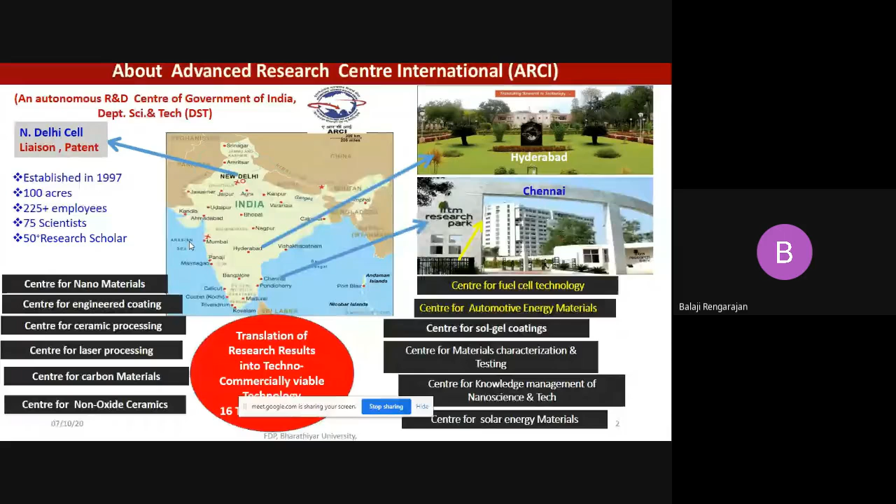Coming to our center, it's the Center for Fuel Cell Technology, established in 2004. We have about 20,000 square feet located at the second floor of the IIT Research Park, a multi-story building. We have a good number of employees ranging from senior scientists to scientists, research fellows, technical staff, students and trainees.

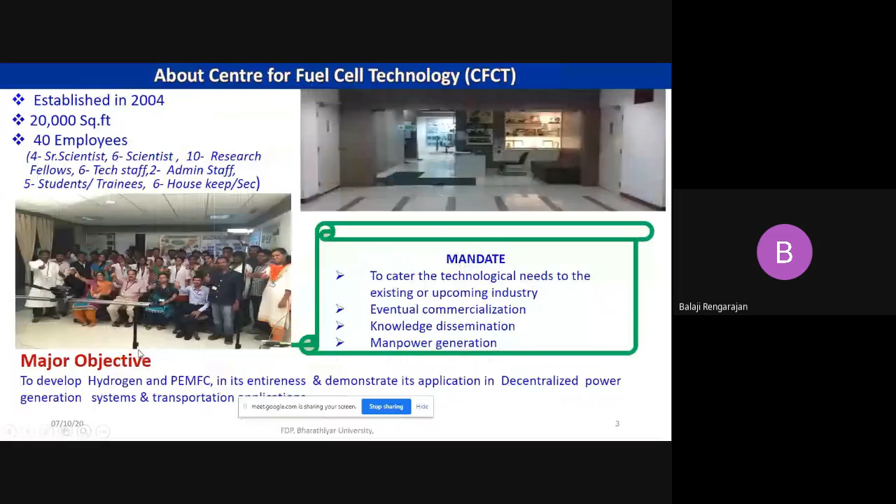As I said earlier, the mandate of the center is to cater to the technological needs of existing or upcoming industry, so eventually working towards commercialization. Our main objective is to develop a hydrogen-based PEM fuel cell system - not only a PEMFC stack, but an entire system. This means considering all the balance of plant required to make a viable system for power generation applications, especially for stationary as well as transport applications. That is the major objective of our center, and we are working towards that direction.

As you are aware, we are looking for alternative energy sources, moving from fossil fuel to hydrogen. We cannot switch over all at once from fossil fuel to a hydrogen-based energy economy, so there is a kind of intermediate stage currently, which I feel is the electric vehicle based sector. That will be the intermediate stage, and the ultimate objective is environmentally friendly, carbon-free or carbonless hydrogen-based vehicles for power generation, especially for transport and stationary applications.

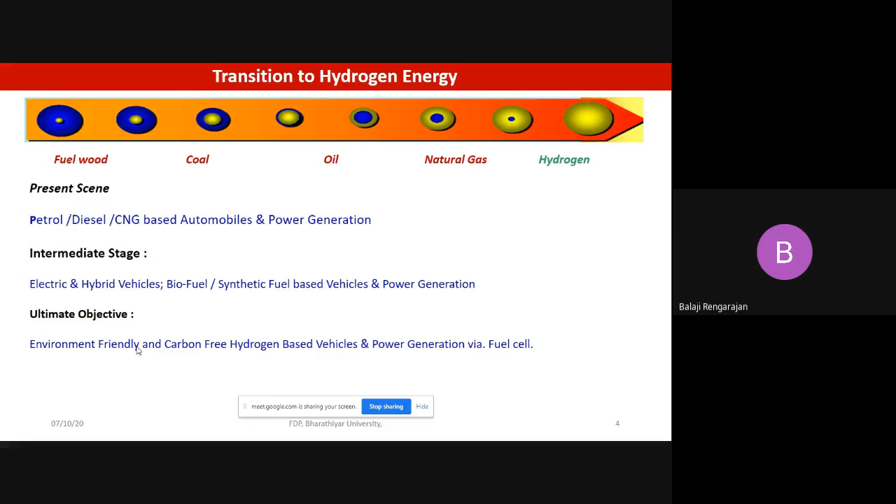That would be the ultimate objective of the entire world, moving from fossil fuel-based energy to hydrogen-based energy systems. There are many energy storage systems available, so why do we need to go with hydrogen energy? The answer is simple: it has high energy density compared with any other fuel, about 142 megajoules per kg of hydrogen, which is quite high compared with all other fuels.

Hydrogen doesn't exist as such; we need to generate it from hydrocarbons or from water. Ultimately that can be carried out using renewable energy as a source to get hydrogen from the fossil fuel or water-based system. When you use this in a fuel cell, there won't be any carbon-containing problems, there won't be any carbon emissions. That is the driving force for the global community to move towards a hydrogen economy, and when you use it for fuel cell vehicles, the carbon emissions are almost zero.

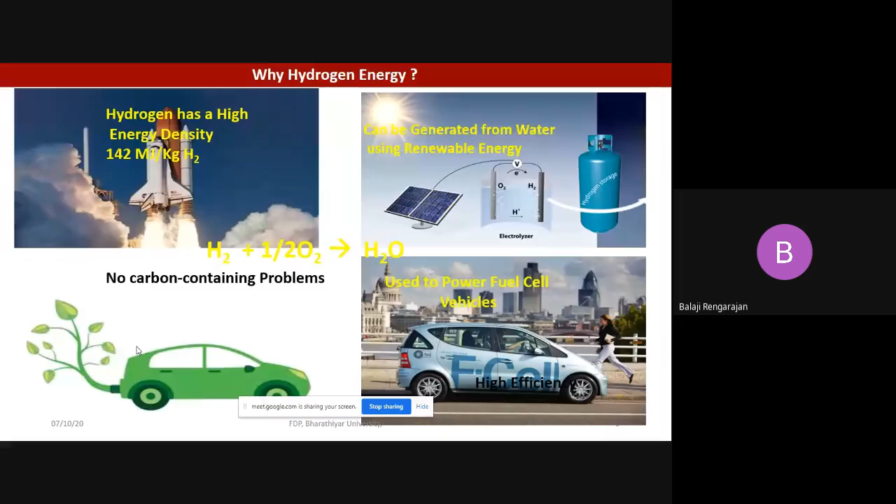So these are the driving forces for us to think about and move towards hydrogen-based economy, especially for transport and stationary applications.

Before going into application of hydrogen fuel cells for electric vehicles and stationary applications, I would like to give a basic overview of fuel cells, so that those of you who are not aware understand the functioning of fuel cells. Hydrogen is the fuel, so it takes hydrogen in and puts out electricity and water vapor.

When you do this combustion in an indirect way, it's an electrochemical way of converting hydrogen into power. The hydrogen gets oxidized at the anode. It's basically an electrochemical system, so you need to have an anode and cathode, which are based on platinum-based catalyst, carbon-supported platinum catalyst on both sides.

When you pass hydrogen gas to the anode compartment, it gets split on the surface of the platinum and generates protons and electrons. The electron goes to the external circuit, and when it reaches the cathode surface where oxygen or air is available, it gets reduced into water. So the ultimate product we get is power and water.

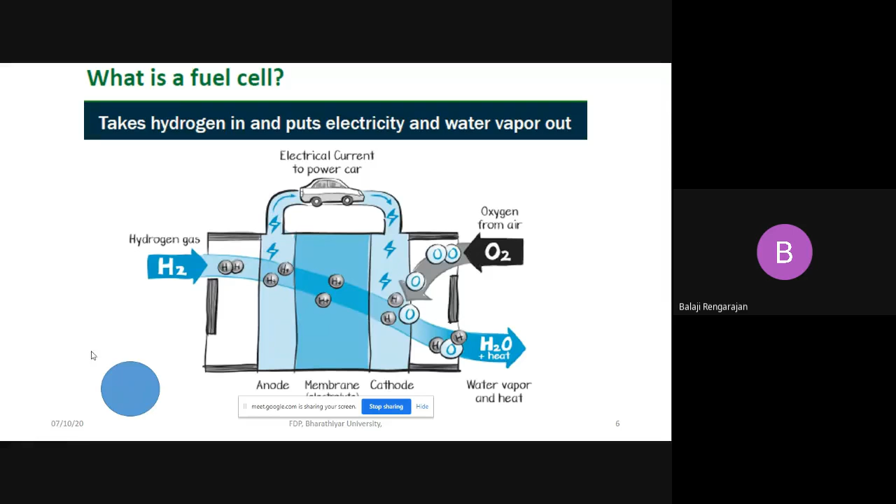That is the uniqueness of this technology. There are no carbon emissions and no other greenhouse gas emissions during this process. So basically it's an electrochemical system.

In any electrochemical system, we need to have electrodes, which are anode and cathode, and you must have an electrolyte. Depending upon the electrolyte used for the fuel cell, fuel cells can be categorized into 5 to 6 different types.

Apart from electrolyte-based categorization, fuel cells can also be categorized based on operating conditions, because temperature plays a major role. Depending on operating temperature and type of electrolyte, it can be categorized as solid oxide fuel cell, molten carbonate fuel cell, phosphoric acid fuel cell, alkaline fuel cell, and proton exchange membrane fuel cell, where we can use hydrogen or low carbon aliphatic alcohols as fuel.

That is named direct methanol fuel cell or direct ethanol fuel cell. Ultimately, that ethanol acts as a source for hydrogen, which is generated in situ in the anode compartment. So that also comes under the proton exchange membrane category.

Among these fuel cells, proton exchange membrane fuel cells are gaining a lot of momentum for stationary as well as transport applications, because the operating temperature is very low, near ambient conditions. The solid oxide fuel cell is also gaining momentum, especially for stationary applications, because the operating temperature is quite high, so it cannot be used for transport applications.

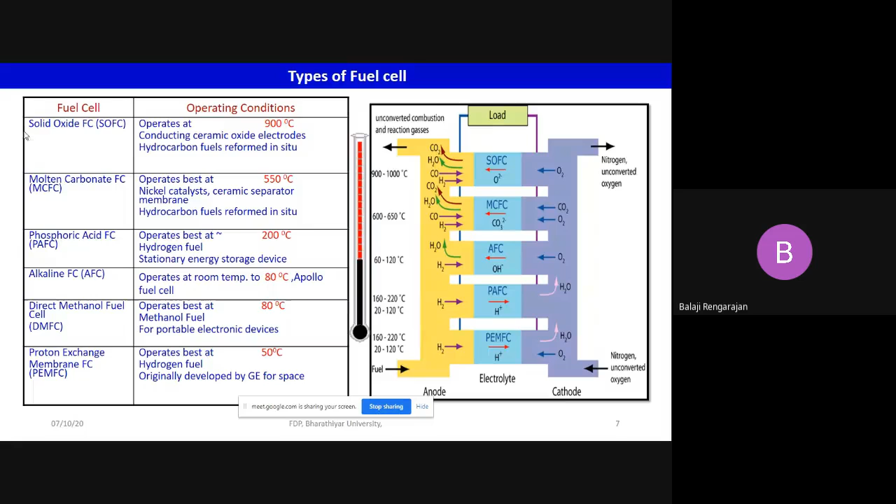In all these fuel cells, hydrogen is the fuel, which gets oxidized at the anode compartment, and air is the oxygen source, where it gets reduced at the cathode compartment, ultimately forming water as a byproduct, along with power generation. Depending on the application area, PEM fuel cell, as I said, is also used.

As a consumer electronics application, especially methanol-based fuel cells. And SOFC, as I said, is only for large scale generators, especially for stationary applications.

Molten carbonate and phosphoric acid fuel cells are high temperature and medium temperature fuel cells, which are also used for small to large scale stationary applications. But because of carbonate formation and other issues, these fuel cells have not been taken up further for commercial use.

And DMFC is only meant for consumer electronics like mobile phones, laptops, and cameras. It's a low power density fuel cell, so it cannot be used for transport or stationary applications requiring higher capacity. It's meant only for consumer electronics like mobile phones and laptops.

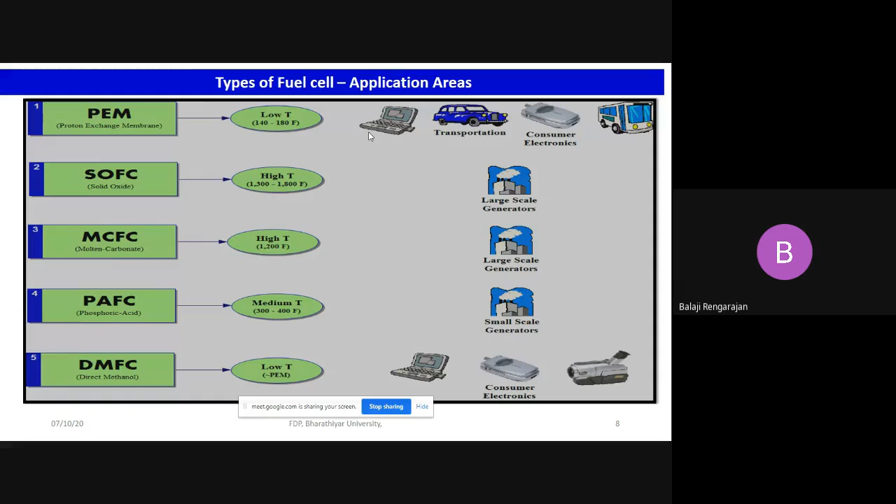So let's get to know about PEM fuel cells. For any fuel cell, especially the polymer electrolyte membrane fuel cells, the open circuit potential is about 1.23 volts theoretically, but in practice we only get about 1 volt. So that is the open circuit potential for the PEM based system.

When you talk about the polymer electrolyte membrane, the main component in this fuel cell is the polymer electrolyte membrane, which acts as a separator as well as the electrolyte. The electrocatalyst, which acts as anode and cathode, is coated on the two sides of the membrane. Once you coat this catalyst on the membrane, you get a membrane electrode assembly, which is the heart of the PEM fuel cells.

On both sides, people are using carbon supported platinum as an electrocatalyst. The amount of loading applied on the anode and cathode side will vary, especially since the large resistance and large overpotentials in terms of electrochemicals occur only at the cathode side. In order to overcome these issues, high platinum loading is usually applied on the cathode side rather than the anode side. So this membrane electrode assembly is the core component for the PEM fuel cell stack.

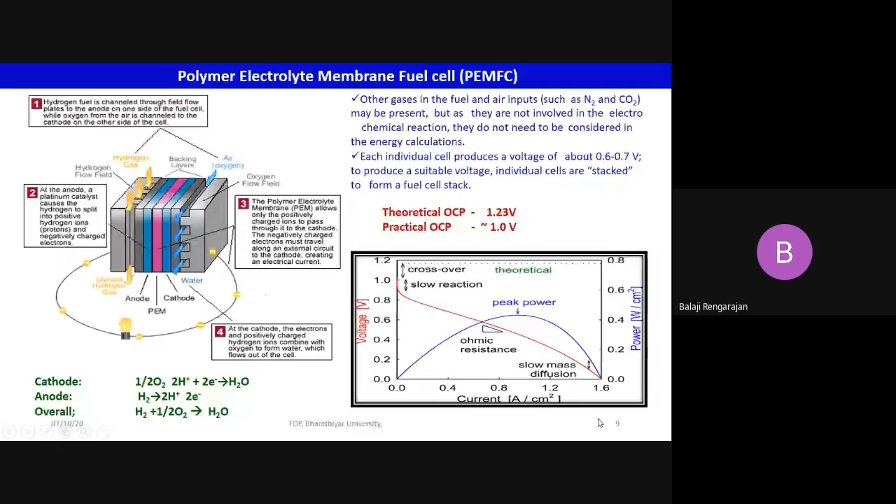The main component of the PEM fuel cell is the membrane, it's a Nafion, a proton exchange membrane. It's basically a Teflon backbone which is functionalized with the ether linkage and the active SO3H sulfonic acid group, which is responsible for the proton transport. So it's basically a very transparent, thin membrane, which acts as a separator for the gases as well as for the proton to transport from the anode compartment to the cathode compartment.

As I said, the platinum electrocatalyst is being used. In order to apply that platinum catalyst, we need to have some kind of substrate, so that is the gas diffusion layer, which is mostly carbon cloth or carbon paper, widely used. This catalyst has to be coated on the gas diffusion layer. Once coated, this electrocatalyst-coated gas diffusion layer has to be transferred to the membrane by hot pressing. You have to apply pressure and temperature in order to bind this gas diffusion catalyst-coated layer to the membrane. That will form a membrane electrode assembly, which is the core component for the fuel cell.

So you have an MEA, and this is a flow field plate, which is most important to facilitate the gas transport on both sides. If you have all those components, you will form a single cell, with the end plate and tie rods in order to pack the anode and cathode very compactly. So this is the typical representation of the single PEM fuel cell.

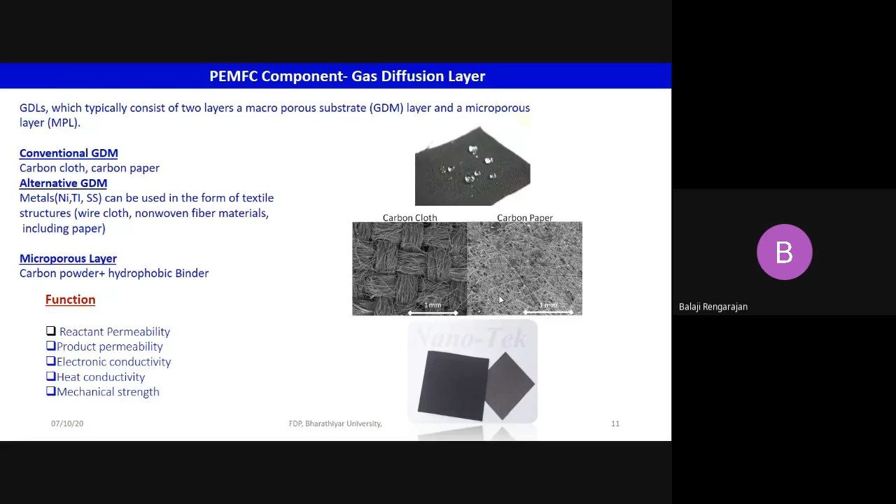If you increase the hydrophobicity of this carbon cloth or carbon paper, you will lose the electrical conductivity. But at the same time, if it is so hydrophilic, the produced water within the system will get choked within the fuel cell. So it has to be hydrophobic also. We need to optimize the hydrophobicity and hydrophilicity of the gas diffusion layer. Accordingly, we need to do some kind of treatment in order to facilitate the gas transport as well as the water removal. That is the role of the gas diffusion layer and its function.

Coming to the electrocatalyst, platinum is a very good electrocatalyst in terms of hydrogen oxidation as well as oxygen reduction. But due to the cost volatility and considering the cost, we need to try to minimize the platinum content on both sides of the fuel cell.

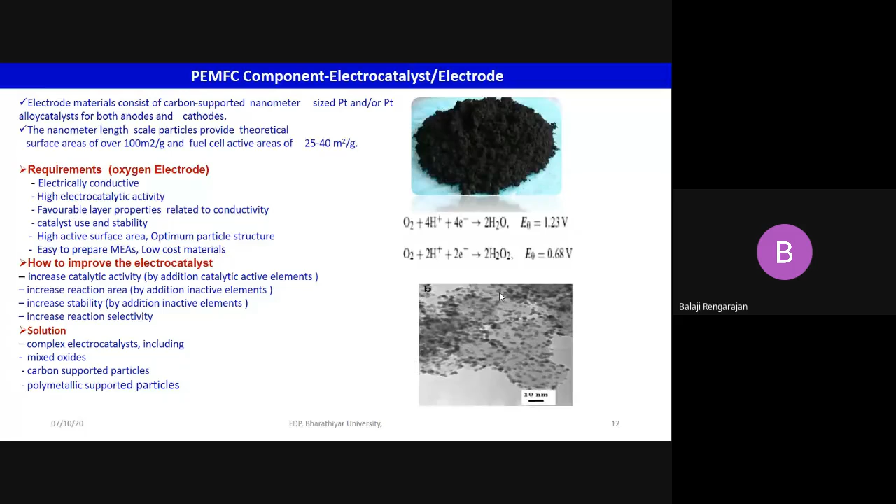So in order to reduce the platinum content and make it more conductive, and to utilize effectively every particle of the platinum, carbon is being used as a support medium to facilitate the electrochemical reaction at both compartments. This carbon helps because platinum nanoparticles are highly active, so in order to avoid agglomeration, carbon plays a major role. This carbon-supported catalyst is used as an electrocatalyst for the fuel cell, and the ultimate aim is to use low platinum content on both electrodes.

Next is the membrane, which is most important, and this component makes the whole world a monopoly. DuPont's Nafion membrane is the monopoly in this technology, and there are many R&D programs going on all over the world, but none of them can meet the required properties of Nafion. So almost 60 to 70% of the world community is depending on this membrane if you want to make a PEM fuel cell stack.

The uniqueness of this membrane is that it facilitates the transport of proton from one compartment to another, and it also absorbs water—hydrophilicity—because it has a tendency to absorb water molecules. So if you want to carry out proton transport within the membrane matrix, it should be in wet conditions. Only then will the effective proton conductivity of the membrane be high. So the membrane should be in a wetted condition, as it has a tendency to absorb water.

But at the same time, if you operate the system at very high humid conditions, water logging takes place within the system. As I said, we need to be optimum in maintaining the water within the fuel cell system and fuel cell stack.

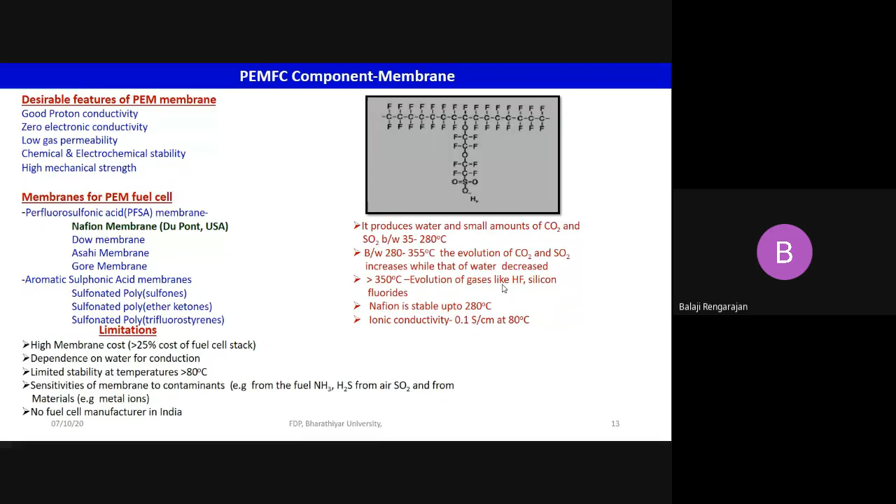And it has a very good mechanical strength—it's basically a thin membrane. If it gets peeled off or develops pores, the direct combination of hydrogen and oxygen will lead to explosion, so that kind of mechanical strength should also be there, and it meets that requirement. It has very good mechanical strength in terms of assembly, it is highly pore-free and will not allow the mixing of gases inside the cell, and it has very good proton conductivity as well as thermal and mechanical stability.

And if you form a membrane electrode assembly, in any electrochemical system, if you try to minimize the inter-electrode distance between anode and cathode, you can reduce the resistance of the cell. So in PEM-based technology, the inter-electrode distance depends on the membrane thickness. There are various kinds of membrane thicknesses available in the market, like 117, 115—these are various configurations of the membrane. The last digits represent the mil, which represents the thickness of the membrane.

Take Nafion 117 for example: 7 mil, and 1 mil is equal to about 25 micron. So 7 into 25 is 175 micron—that is the thickness of the membrane, and that is the distance between the anode and cathode.

So if you try to minimize the inter-electrode distance by using a thinner membrane like 212, only 50 micron is the thickness of the membrane, which determines the inter-electrode distance between anode and cathode. If you use a thinner membrane, the resistance of the cell will come down, so the performance will go up. That is the kind of trade-off we need to consider when assembling a PEM fuel cell system.

And as I said, the catalyst loading at the anode side should be low because of the higher exchange current density and faster kinetics of the hydrogen oxidation. In terms of oxygen reduction especially, the kinetics is very slow, so in order to increase the kinetics, we need to use higher platinum content.

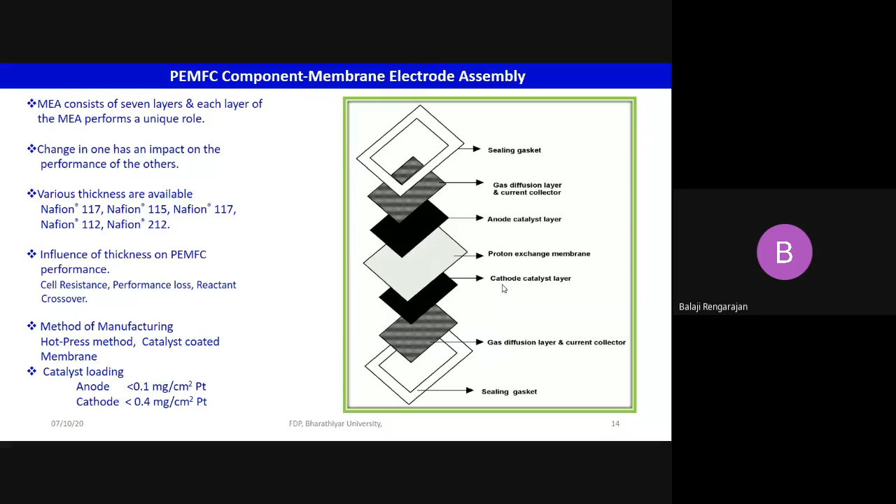So the cathode has more platinum content than the anode. This is the bipolar plate, which I discussed earlier. Graphite plate is being widely used as the bipolar plate, and it has very good electrical conductivity, thermal conductivity, and mechanical stability.

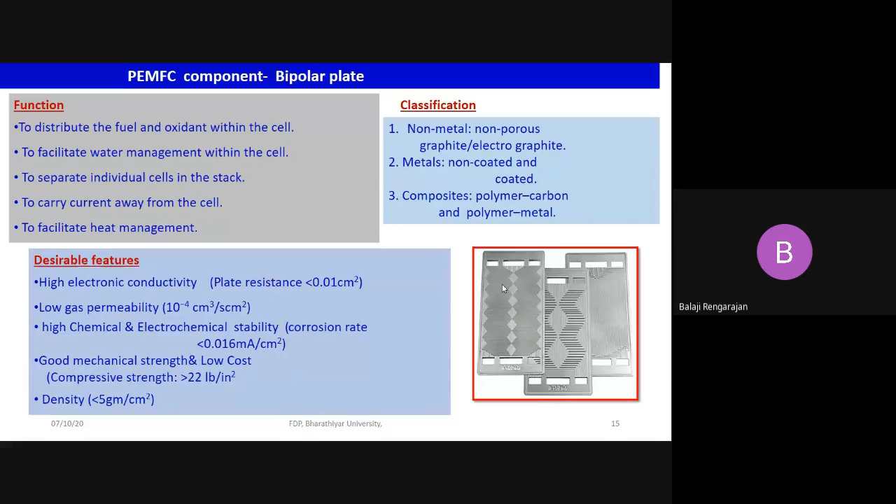So all these are desirable features which graphite has. Most PEM fuel cell stacks are fabricated using graphite as the flow field plate, which facilitates gas transport on both sides of the cell.

As I said, the stoichiometric quantity of hydrogen and oxygen has to be varied depending on the load we are drawing from the system. So for example, H2 plus half O2 gives H2O. For a 1 kilowatt system, you have to pass 12 liters per minute of hydrogen and 6 liters per minute of oxygen, so it should be in the stoichiometric ratio of 1:0.5.

In order to handle such volumes of gases at the two different compartments, we need two different flow field channels, which determine the volume of gas we need to occupy at a particular time in order to draw the maximum amount of load or current from the system.

There are various design patterns available, depending on the type of application for which you are using the fuel cell. It can vary from grid type, straight parallel, single serpentine, or multiple serpentine — these are all different flow patterns for handling the stoichiometric hydrogen and oxygen.

This is also one of the cost components in the PEM fuel cell. More than 25% of the fuel cell stack cost goes to the bipolar plate, which also determines the volume of the fuel cell stack.

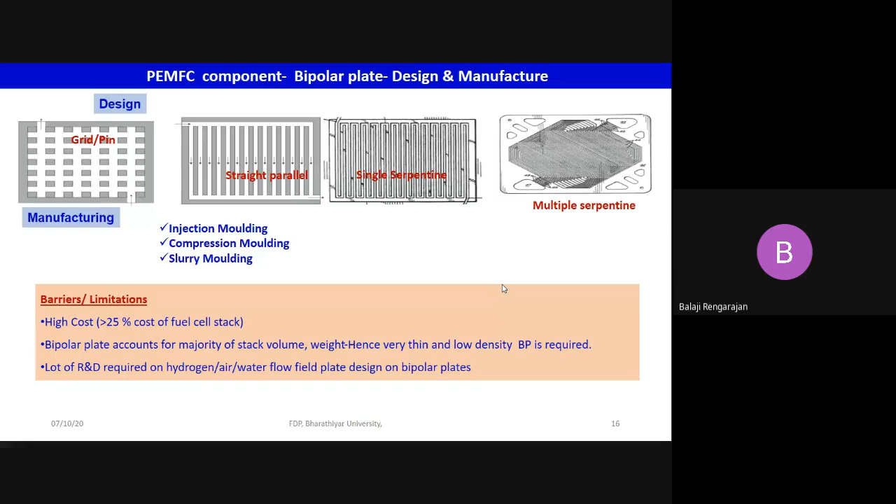So as long as you use a very thin graphite plate, the volume of the fuel cell stack will come down. This is also a deciding factor in terms of volume occupancy of the fuel cell, especially for transport and stationary applications.

So once you form all the components, you can make a cell, and depending on the current and voltage requirement, multiples of this unit will form a PEM fuel cell stack. These are the schematic diagrams of a single cell and PEM fuel cell stack of a hydrogen-based system.

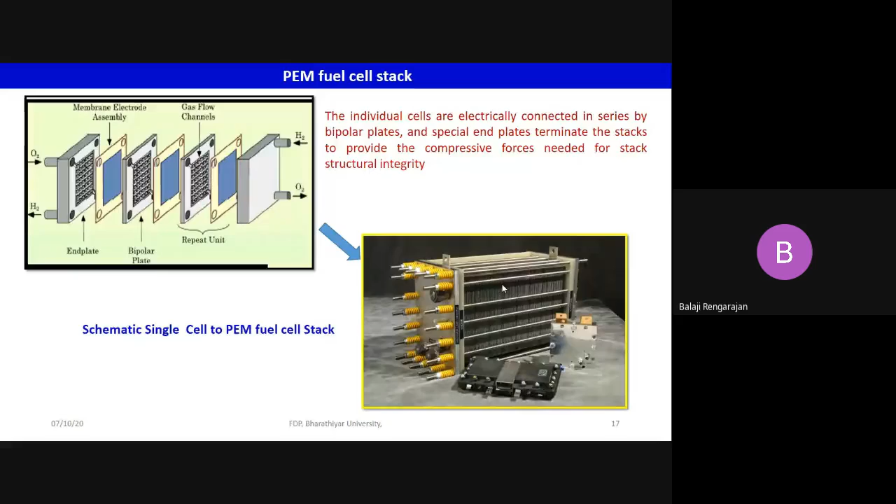As I said, water management is a very crucial step in the PEM fuel cell, because if you remove all the water from the system, the membrane conductivity will go down — proton conductivity is effective only when there is water within the system. But at the same time, if you keep too much water in the system, it will not facilitate gas transport from the outer side to the inner side, and will not allow gas to enter the catalyst surface. So water management is a very critical step in the PEM fuel cell stack.

So it should be hydrophilic as well as hydrophobic — it's the kind of optimum condition we need to attain in making the membrane electrode assembly. Water management is very crucial; it should be maintained in an optimum way within the system.

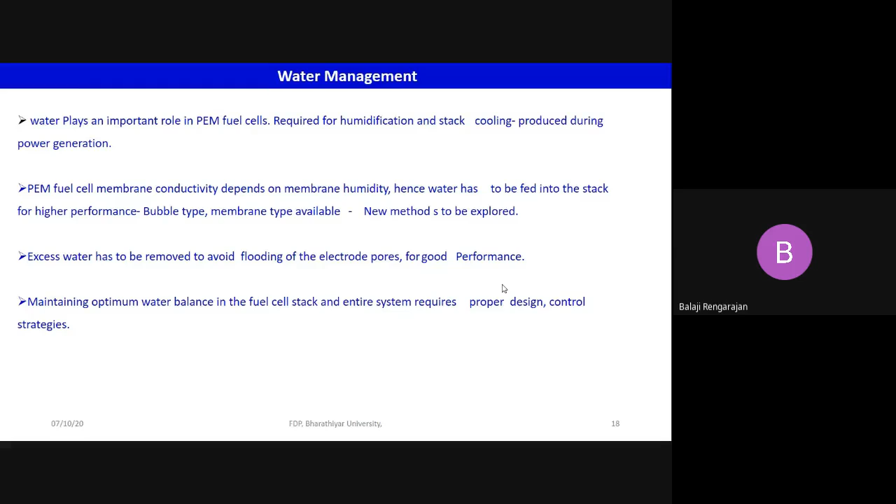As I said, thermal management is also crucial, because a 1 kilowatt system will also produce 1 kilowatt of heat, but it is low grade heat. So we need to effectively manage it, because the operating temperature of a PEM fuel cell stack is about 60 to 70 degrees.

If you operate at a higher temperature, membrane dehydration will take place, because above 100 degrees Celsius the water vapor will escape, causing membrane dryness. This creates a proton conduction loss that reflects in performance. So the optimum temperature for the PEM fuel cell stack is about 50 to 70 degrees Celsius.

So in order to maintain that temperature, you have to effectively remove the heat produced during the electrochemical reaction. In a 1 kilowatt system, about 1 kilowatt of heat has to be dissipated, so we have to have a proper thermal management system.

Water or air can be used as the coolant, which is widely used for the PEM fuel cell stack. But the water-based cooling system is viable when you operate the system at higher kilowatt. So up to 3 kilowatt, you can use air as the coolant, but when you develop a stack more than 3 or 5 kilowatt, you need to go with a water-based cooling system.

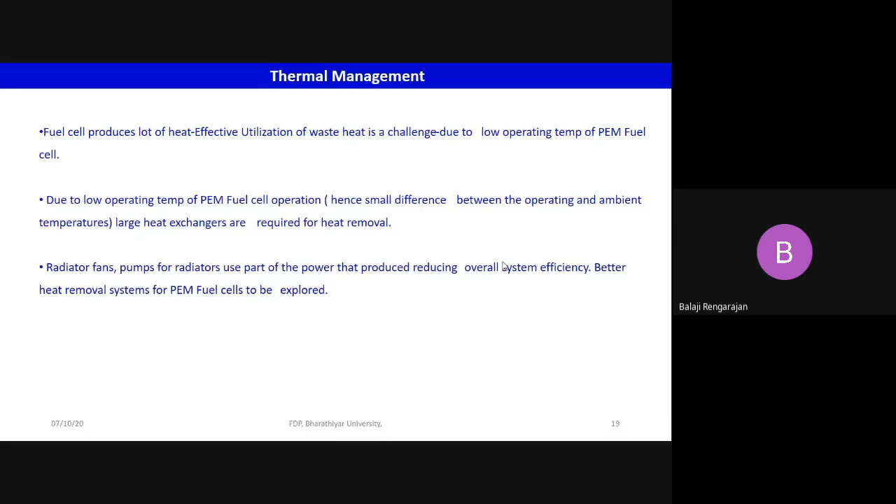So as I said, when you talk about the PEMFC fuel cell stack, it's a stack. When you talk about the system, we need to consider hydrogen as a fuel. Hydrogen does not exist as such, so it has to be produced from hydrocarbon or water. So you need a fuel, maybe hydrocarbon, natural gas—that is the fuel.

You have to process that hydrocarbon, especially methane, so it has to be converted into hydrogen-rich gas. So methane has to be converted into hydrogen—that is called the fuel processor. So through reformation, you reform the natural gas into hydrogen. The fuel is methane, and that has to be reformed into hydrogen using the fuel processor.

So the power fuel cell stack is the power section, and you need to have an air supply system. Depending upon the load, depending upon the current you are drawing from the fuel cell, you need to pass hydrogen and air accordingly—this is the load-following gas flow controller.

So a 1 kilowatt system can also operate at 300 watts, and at that time the fuel consumption and air supply has to be minimum. The same 1 kilowatt system, if operated at 700 watts, requires increased flow of hydrogen and air. So depending upon the load, load-following gas flow controllers are the most important component in making a PEMFC system, and that is the power section.

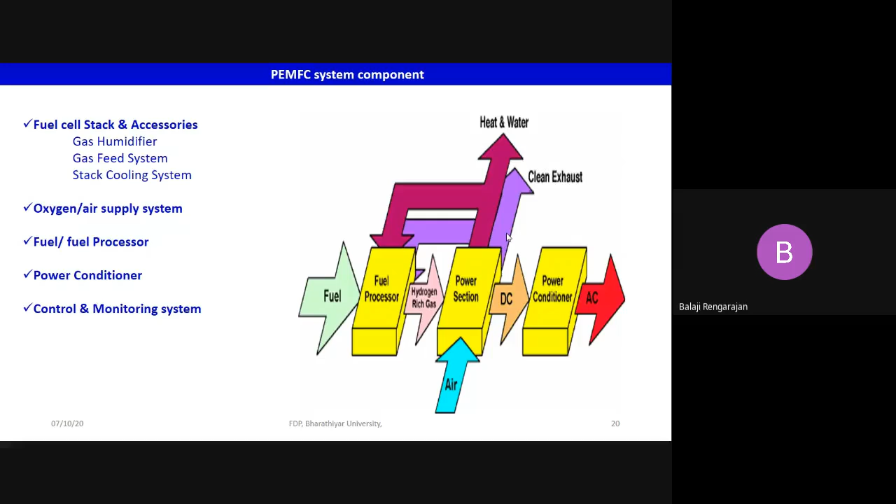But if you fail to monitor the health of each individual single cell, it will collapse the entire system. So the control and monitoring of the system also plays a major role when you develop a PEMFC system.

And the control strategy—we need to have some kind of strategic way of controlling these parameters. Especially in the case of fuel cells, it's a current driven process, not a voltage driven control strategy. These are current driven, basically based on load.

So if you have a 1 kilowatt system operating at 500 watts, the amount of water production will be low, the amount of heat production will be low, the fuel consumption will be low, and the diffusion process will be low. But if you operate the same system at 1 kilowatt, all these parameters change—heat production will be more, water generation will be more, fuel consumption will be more, and diffusion of the reactant will be more. So all these processes are controlled by the current.

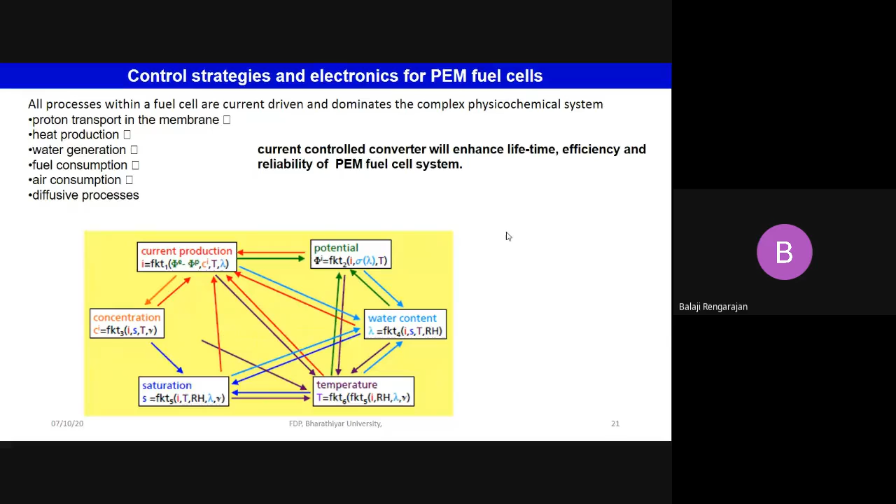So we need to have a control strategy, we need to develop an algorithm. It's a current driven and complex physicochemical system in the case of fuel cells, not a voltage based thing. So when you develop a control and monitoring system for the PEMFC, everything is based on the current driven process. That's what I want to highlight here.

When you talk about the PEM system, these are the factors we need to consider. Considering all these factors, the major activities taking place in our center is that it's not only PEMFC stack development—we develop the entire system, as discussed in previous slides. We take care of all the subcomponents, power consumption, functioning, compactness, volume, and all these considerations when we make a PEM fuel cell system.

And as I said, we also have a hydrogen generation program in a bigger way, and we developed a system with about 2,500 liters per hour production capacity.

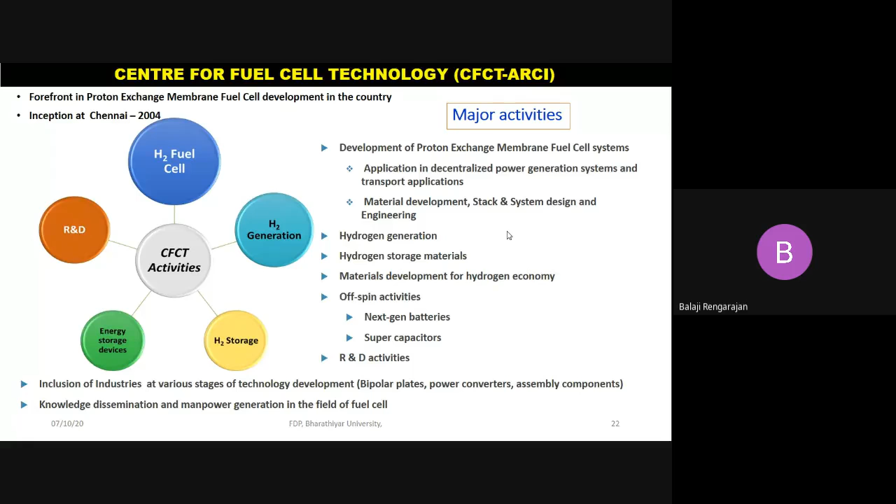And we have some kind of spin-off technologies, because if you see supercapacitors and next generation batteries, these are all spin-off technologies of the fuel cell—most of the components are similar to PEM fuel cell, and most of the material we develop is also used for other spin-off technologies like supercapacitors and batteries.

So this is our fuel cell development, and we also do a lot of R&D on materials development and component development for the PEMFC. But if you want to make a system level, you have to start with commercially available material. So if you want to make a system level, let's say 5 kilowatt, 10 kilowatt and 20 kilowatt systems, we will buy the commercially available components like catalyst, membrane and bipolar plate, and we do membrane electrode assembly, and we build the stacks, and we will develop our own control system and BOP components, and demonstrate the system for stationary and transport applications.

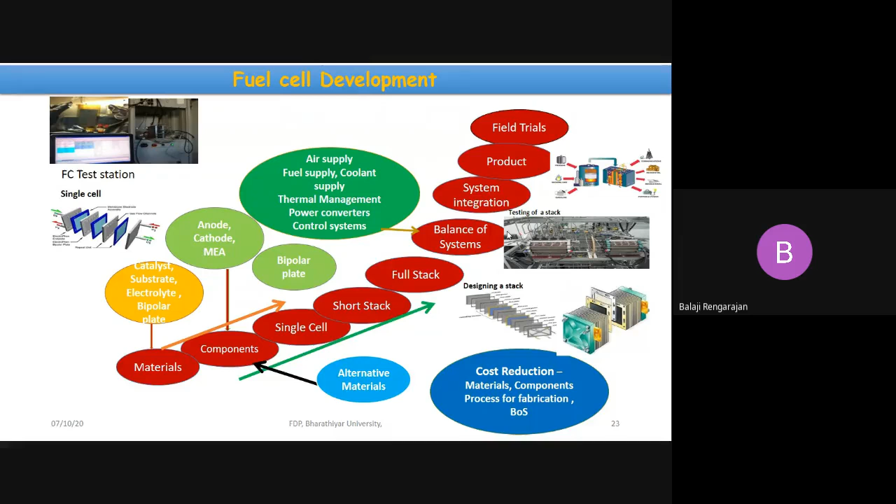That is one activity. Parallelly, we also develop materials which are tested initially at single cell level. If it works fine, we take it up for the next level of short stack and full stack. That is our parallel R&D activity, which is also going on with the help of students and other scientists. One is system development, another is component development, and another is material development. So we try to cover all aspects of this technology.

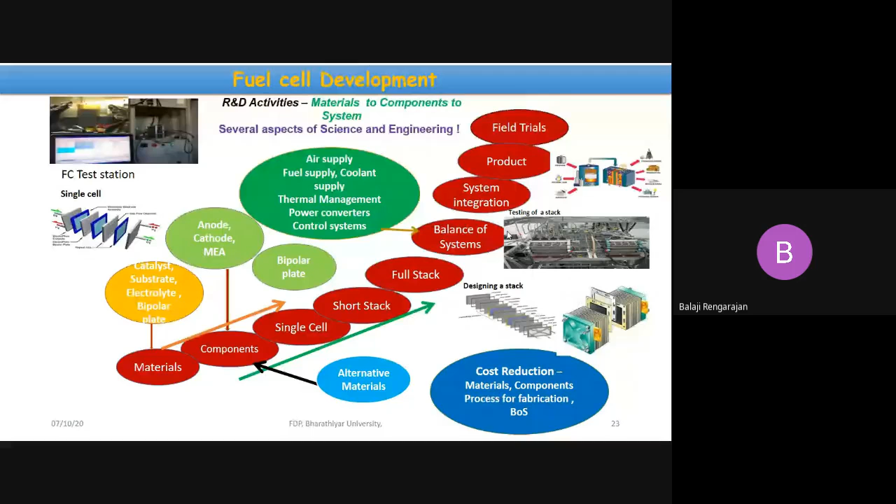So ultimately, cost reduction is the objective. We try to minimize the cost of the system, as well as increase the durability and reliability of the system. So this is our PEMFC technology development.

As I said, one of the core components is the bipolar plate, and ARCI has the technology to replace natural graphite, which is widely used for PEM fuel cell stack fabrication. ARCI has a technology of exfoliated graphite, which is 50% lower density than graphite, which will always reduce the stack weight. We use that exfoliated graphite material for making our own bipolar plates, which are very compact. Making grooves by machining is a tedious process, especially for graphite. Whereas in the case of exfoliated graphite, you can create flow channels simply by molding technology.

That is the uniqueness of our PEM fuel cell stack - 50% weight reduction in overall stack development, and it can also facilitate the process of creating flow channels over the graphite flow field plate. We could achieve 50% weight reduction compared to graphite. That is the uniqueness of our PEM fuel cell stack.

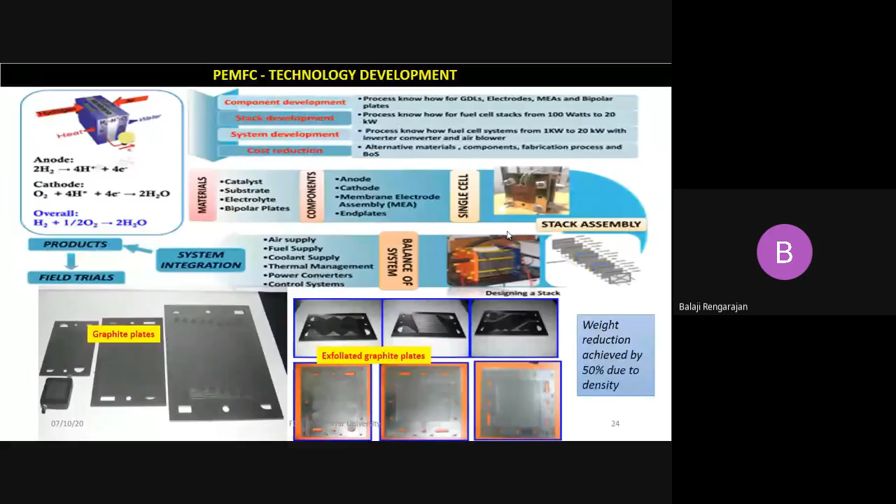And we have demonstrated systems ranging from 1 kilowatt to 20 kilowatt for stationary applications. It's completely grid independent - if you have hydrogen cylinders, you will get the power.

We have a small battery in all systems for the initial startup of all BOP components. For example, the blower has to supply air, you have to activate the mass flow controller for hydrogen supply, and you have to power on the converters and inverters. All these initial power requirements are met by the batteries. So all systems have a small battery for startup power, and once the system is ready to function, the battery is also charged by the fuel cell.

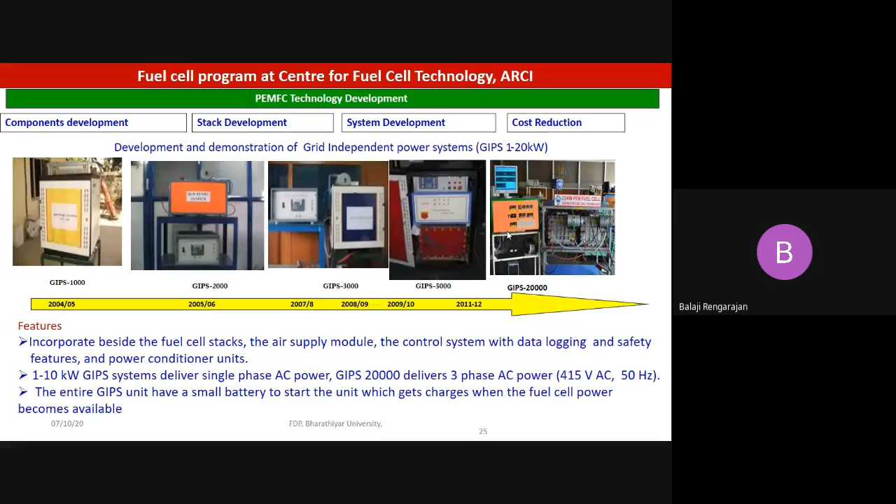We have demonstrated the fuel cell stack ranging from 1 to 20 kilowatt for stationary applications. The fuel cell produces DC power that has to be converted into AC. We have single phase up to 10 kilowatt, and more than 10 kilowatt we have a 3-phase system, which was demonstrated within our premises. As I said, the fuel cell produces DC power which needs conversion into AC, but we try to avoid that step because the conversion loss will reflect on fuel cell efficiency. So we try to use that DC power as such for various applications.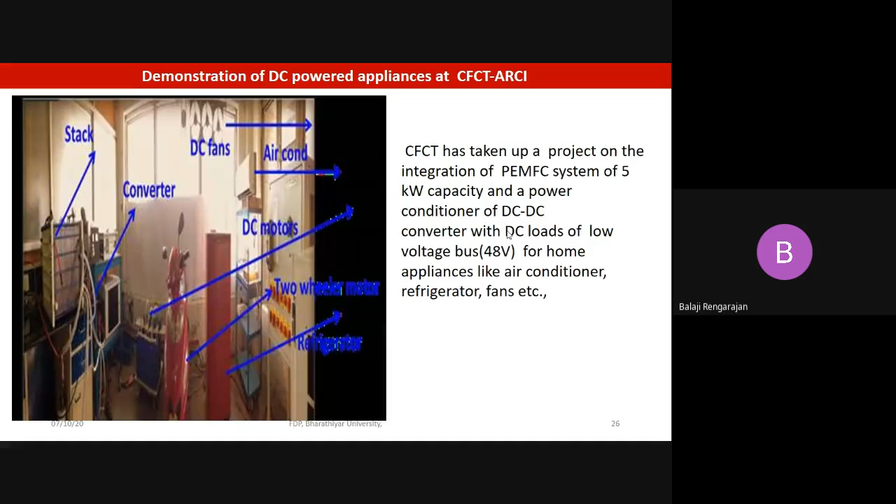So we have demonstrated DC appliances, especially DC fans, converters, air conditioners, DC motors, two-wheeler motors, and refrigerators, all at 48 volt DC. We don't want to convert the DC power into AC again, so we try to demonstrate 48 volt output from the fuel cell, which is used for all essential appliances. So that's all about the stationary application.

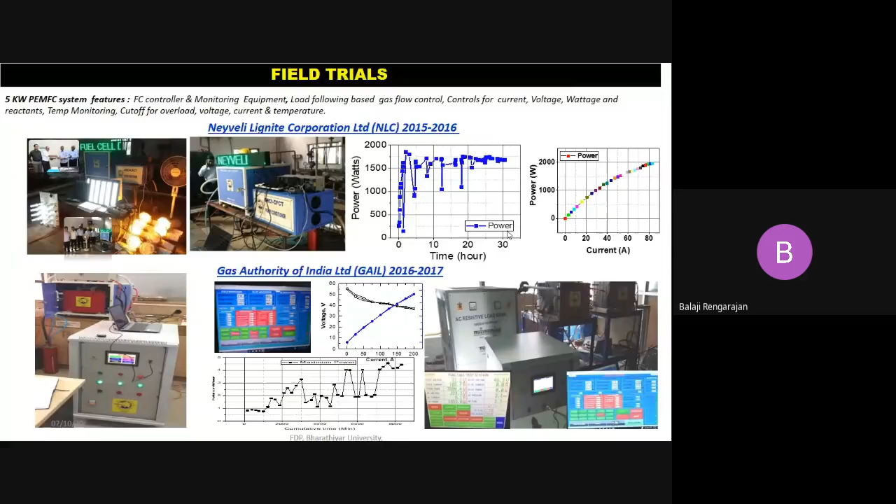As I said, we develop a system, and wherever hydrogen is available, we go and install our system for field trials. That is the current activity going on in a big way. We demonstrated our system for Neyveli Lignite Corporation, where they have plenty of hydrogen being used for other applications, and Gas Authority of India Limited, who have hydrogen and want to make use of it to power their premises. We demonstrated up to 5 kilowatt capacity in these two organizations, and we also built the system for stationary applications, and installed our system at BARC, where hydrogen is available.

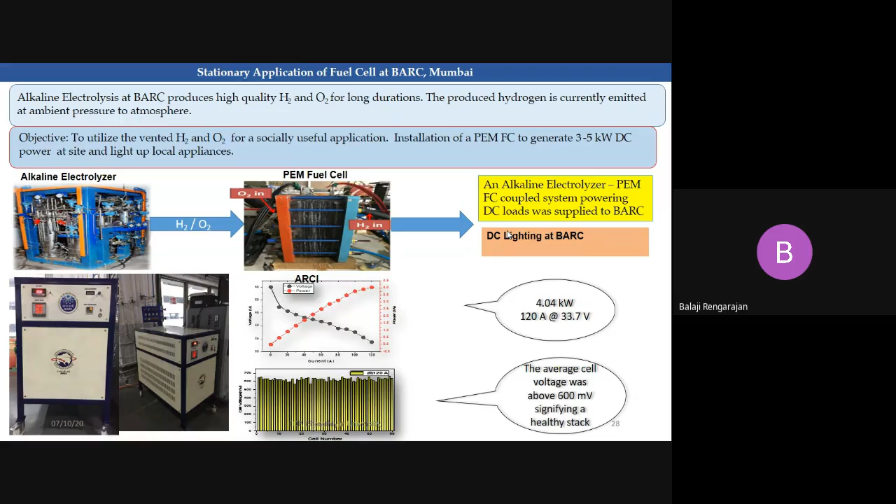So as I said, wherever the hydrogen gas is available, the fuel cells, we will go and put it there, and we will do the field trial and get their feedback on how it actually functions in real conditions, apart from the lab.

So these are some of our demonstrations. Recently we did a demonstration for disaster management with the Tamil Nadu government, because it's in some of the worst conditions and they wanted to use it for disaster management. So if you have hydrogen cylinders, it's a kind of truck where we have all our PEMFC system, and we did a demonstration for emergency power applications, which was acknowledged by Radhakrishnan, the current health secretary. So these are the stationary applications.

Coming to the transport application, PEM fuel cell is playing a major role. What we did is not completely fuel cell powered vehicles; we use the fuel cell as a range extender with a battery. So we did demonstrations for the Reva car, Go-Kart, Mahindra 3 kilowatt hybrid fuel cell 3-wheelers, 5 kilowatt hybrid fuel cell 3-wheelers, and fuel cell powered scooters. In all these systems, we have our own PEM fuel cell stack as a range extender in addition to a battery.

So it has all the safety features, because we are handling hydrogen gas, so ultimately we need all the safety alarms and power converters. In all these vehicles we use commercially available hydrogen cylinders which we carry along with the vehicles. I'll come to that discussion later in my presentation. Actually, hydrogen storage is the most critical step if you want to use this PEM fuel cell technology for transport applications.

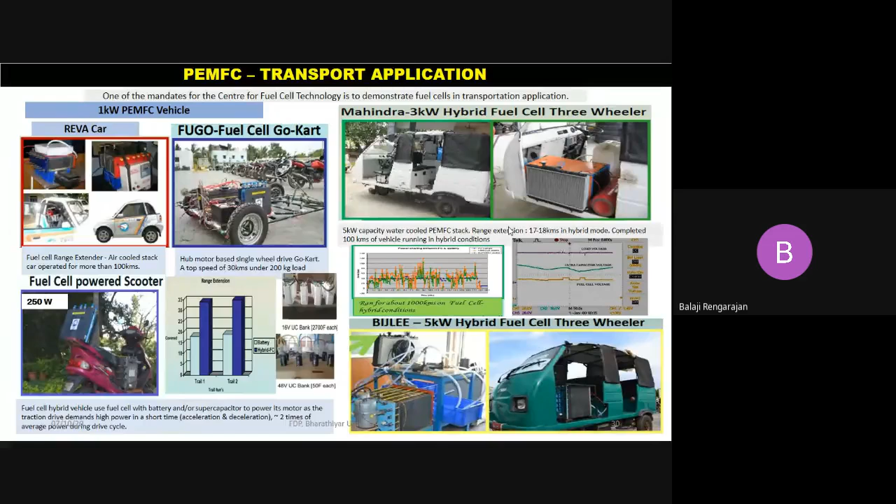Apart from transport, the forklift is one of the market areas where we can push our PEM fuel cell technology to power forklifts. In warehouses, especially Amazon and other international key players, they have very big warehouses with many forklifts powered by battery or diesel. They try to replace those battery and engine powered forklifts with fuel cells. With that objective, we also developed an air cooled PEM fuel cell stack for forklift applications.

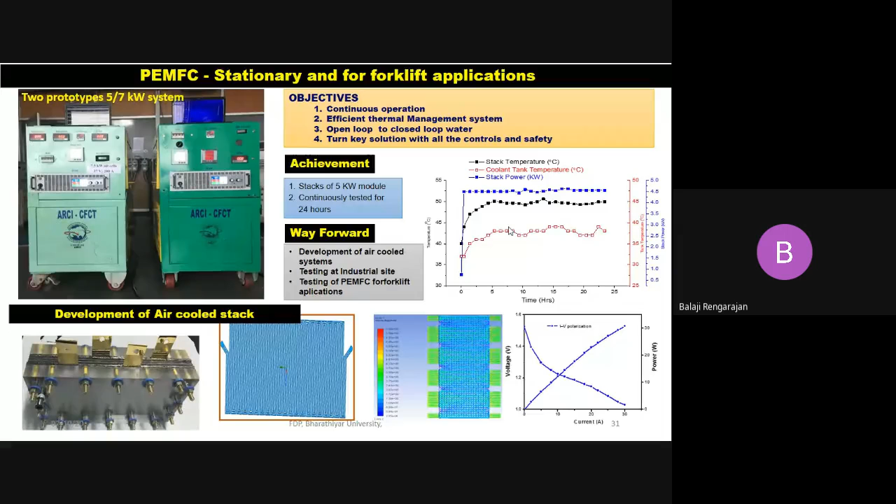Globally, the current initiative towards PEM fuel cell transport applications includes Hyundai, Toyota, and Honda Clarity, which are all commercially available fuel cell vehicles. The power capacity of these fuel cells ranges from 100 to 120 kilowatts. I also experienced, when I visited Canada, the Toyota Mirai, which is very quiet, compact, and fuel cell powered.

So as I said, if you want to make such a product in a developing country like India, we need to go a long way. The main thing is hydrogen storage. The fuel cell needs to be compact, because the space occupied by the system should be very small, and the subcomponents' power consumption as well as space constraints have to be taken care of, and obviously the hydrogen storage, the hydrogen cylinders.

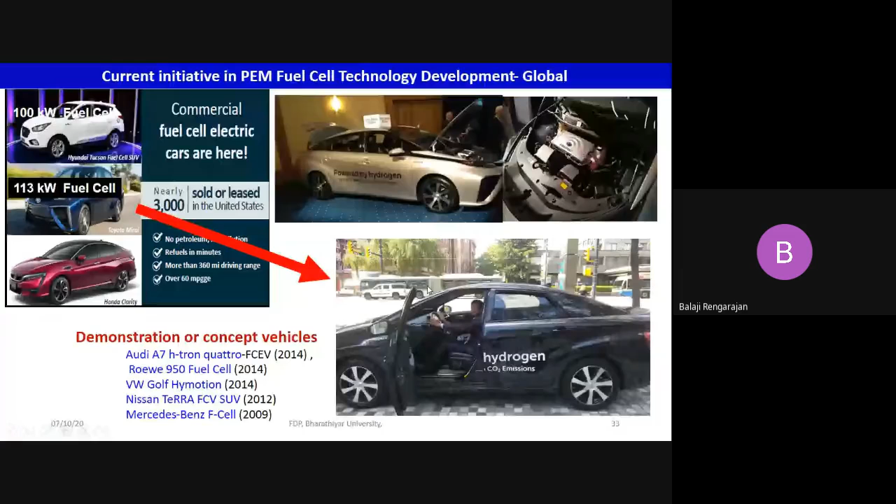And the thermal system, the cooling, is essential, like our IC engine's radiator. We need an effective cooling system. For example, a 100 kilowatt fuel cell vehicle also emits about 100 kilowatt thermal power, which has to be dissipated properly. So you need a proper thermal cooling system, and you must have a battery as auxiliary power.

In an electric drive vehicle, the auxiliary battery provides electricity to start the car before the traction battery is engaged, and also powers vehicle accessories. So you need an auxiliary battery for the initial startup. That is called the auxiliary battery system, which also takes care of power consumption for auxiliary equipment.

And the fuel tank is also very crucial in hydrogen based fuel cell vehicles. You need high pressure cylinders, more than 400 to 500 bar pressure, because if you increase the pressure, you can reduce the number of cylinders you need to carry in the vehicle. That reduces vehicle weight and extends mileage. That's the concept behind it.

You need to use high pressure cylinders, and you must have a fuel filler, because at dispensing stations you need some kind of nozzle which will balance the inlet pressure and the storage pressure. So you must have a fuel filler, and the nozzle is a very crucial step we need to develop in order to operate high pressure hydrogen.

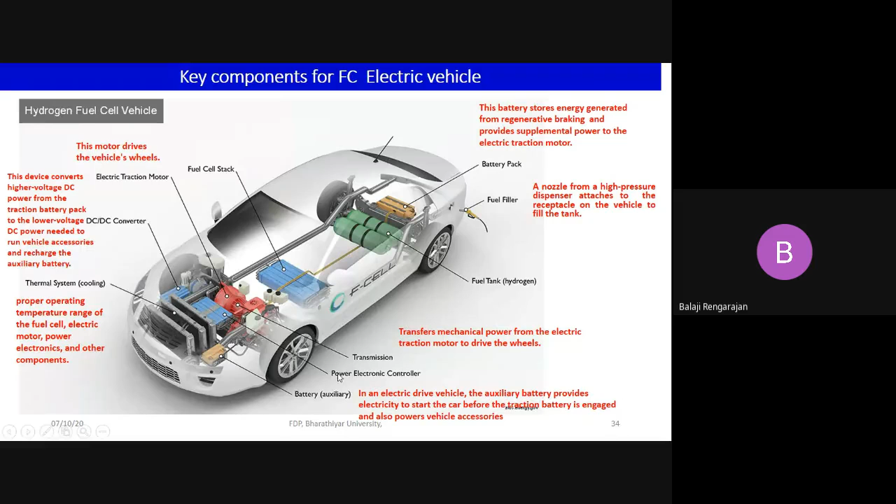Compared with lithium battery based electric vehicles, the advantage of a fuel cell electric vehicle is that the amount of weight is less, and it takes up less space in the vehicle. Compared with a battery pack, the fuel cell stack will not occupy much space, and it generates less greenhouse gases, because if you want to power the battery, you have to depend on the grid.

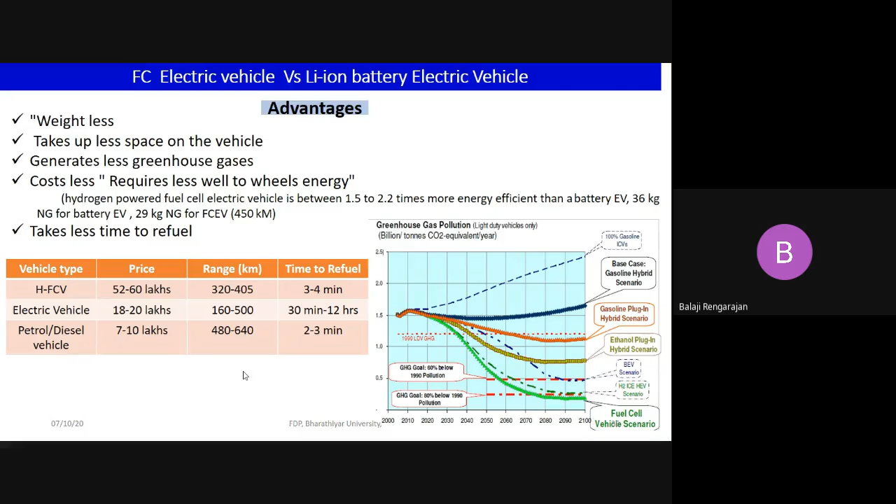So when compared with battery vehicles, hydrogen fuel cell vehicles occupy less space, produce less greenhouse gas emissions, and take less time for refueling. These are the main advantages when we go with hydrogen based fuel cell vehicles compared with lithium ion based electric vehicles.

The challenges towards the development of fuel cell electric vehicles include onboard hydrogen storage. As I said, we need to carry fewer hydrogen cylinders, so to carry less number of hydrogen cylinders, you need high pressure storage cylinders. That is one of the challenges we are facing.

And the cost, because the difference between price and cost depends on the margin. It's a new technology, so the margin has to be less, which will obviously reflect in the price. The price will go lower when demand increases, so that kind of logical policy change has to be taken care of.

And durability and reliability, because in transport applications, the fuel cell powered vehicle has to meet at least about 5,000 hours lifetime. That was the target fixed by the Department of Energy for transport applications, and the cost and reliability, because the fuel cell's life has to meet at least 5,000 hours.

Hydrogen infrastructure is another challenge, because we need very good infrastructure for refueling fuel cell vehicles. Fuel cell vehicles we can get, but where are the hydrogen sources, where is the hydrogen infrastructure? So we need to give a lot of attention to the generation of hydrogen as well as creating infrastructure like petrol stations.

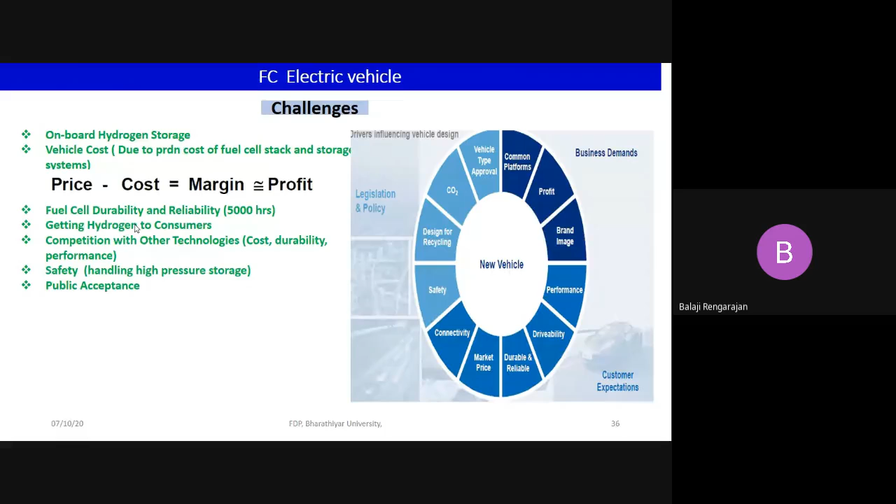And safety, because as I said, hydrogen is a very light gas and it's inflammable. The flammability of hydrogen gas lies between 4 to 75%. 100% hydrogen is completely safe; only the 4 to 75% range is the flammable limit. This has to be taken care of in terms of safety and public acceptance. We have to create a lot of awareness among the public to handle hydrogen for electric vehicles. So this is a small analysis comparing battery and hydrogen.

As I said, hydrogen is not available as such. You have to create it from some other source like hydrocarbon or water. So if you still depend on hydrocarbon, we are also emitting some greenhouse gas. But if you depend completely on renewable based energy systems and water as the source for hydrogen, then this route will be completely green.

If you take electrolysis of water, using power from PV to split the water molecule into hydrogen and oxygen, then use that hydrogen and oxygen in a fuel cell, you'll get back power and water. It's similar to lithium batteries, like charging and discharging. This is called round trip efficiency.

So you're using renewable energy to get hydrogen, and that hydrogen, if used in a fuel cell, you will get back power and water.

If you compare with lithium battery, there is a term called energy stored on invested. If you want to develop a 1 kilowatt battery, how much energy have you spent to create it? And if you use that battery over a period of time, how much energy is generated from it? If you do that ratio analysis, comparing how much energy you spend to create the battery versus how much you get back over its life, the energy stored on invested is higher for hydrogen than for lithium ion battery.

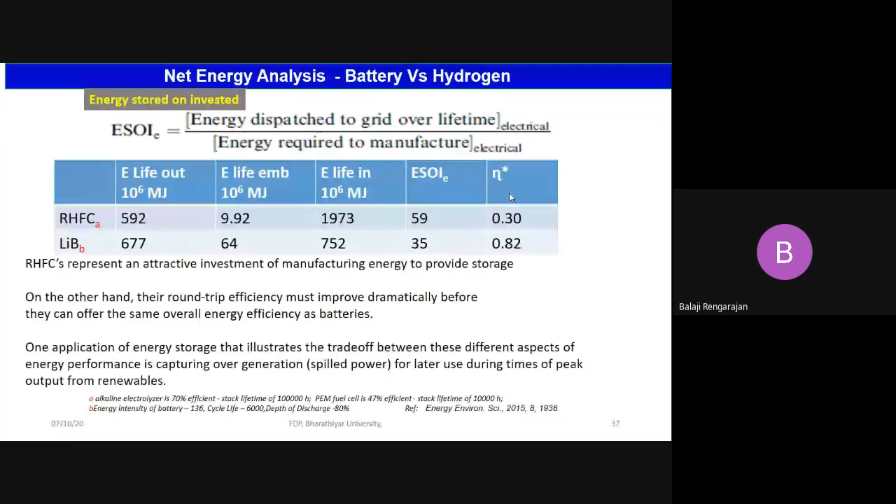So if you try to minimize that gap and increase efficiency, the current 30% efficiency can go up to 45 to 50%. There is a lot of R&D and material development, component development needed. If we focus on minimizing the gap existing between 1.8 and 0.6 volts, in the longer term, hydrogen fuel cell based electric vehicles will be the ultimate solution for electric vehicles.

With that note, what needs to be done is material development. There are many R&D groups functioning in India, but only on material development, not on system development. So people like us working on system development need to consider manufacturing R&D of key components. Currently ARCI is developing a fully automated PEM fuel cell assembly line, which will be ready in the next couple of years. We are going to have a 100 kilowatt per year production capacity of PEM fuel cell systems.

Currently we are working towards establishing a complete automation line for making fuel cell stacks, along with various field trials we need to attempt, and handling high pressure cylinders in India. So the policy has to change. We are waiting for government approval to handle high pressure cylinders, especially for transport applications, and we need to create a set of protocols to handle these hydrogen based fuel cell electric vehicles.

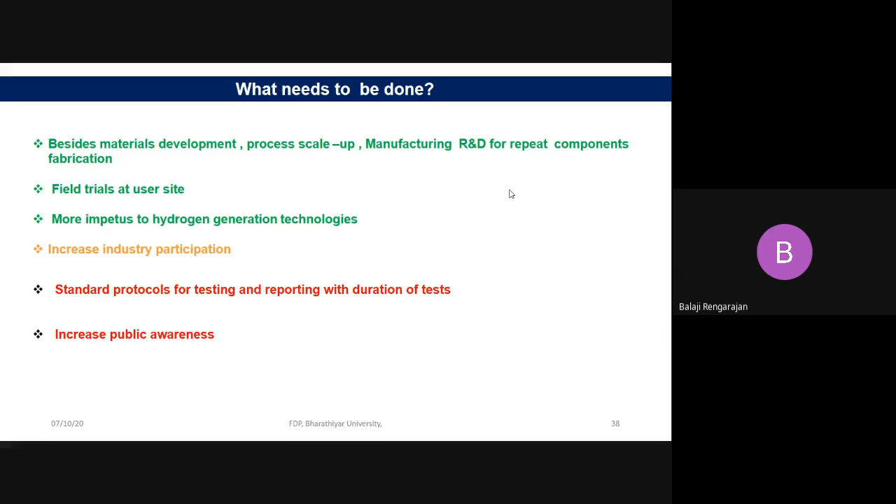Globally there are many protocols available, but we need our own testing and usage protocols when we want to use hydrogen based electric vehicles. And ultimately, public awareness has to be increased if we want to really take up this technology for transport applications. With that objective, the National Hydrogen Fuel Cell Day was established, because 1.008 is the atomic weight of hydrogen, so 8th October every year is celebrated as National Hydrogen Fuel Cell Day.

For the last two years we have also been celebrating National Hydrogen Fuel Cell Day by conducting various workshops and demonstrations. This year, tomorrow, we are conducting it on a virtual platform to create awareness among the public through a series of eminent lectures and demonstrations for public awareness.

As I said, we need to live with carbon. Currently we are living with more carbon; in the future we need to live with less carbon and more hydrogen. With that end note, thank you for the opportunity, and I am open to your questions. Thank you.